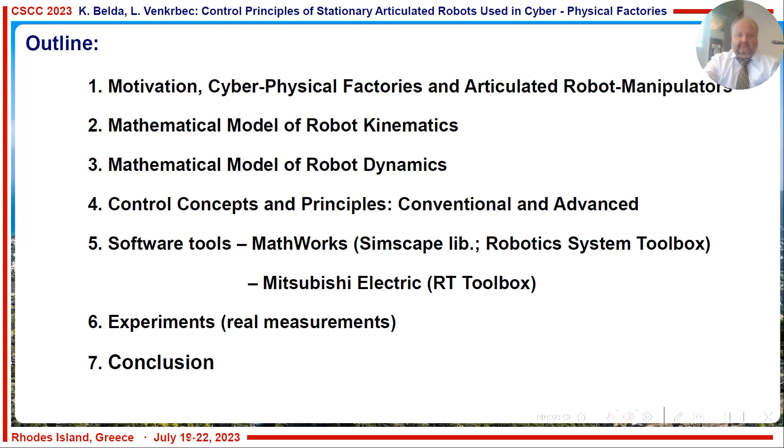Very important point is networking. So all components are set in nets, and also we should take into account big data. So we should collect the information from any sensors and make some analysis and so on. And a very important point is virtualization. So today somebody mentioned that mass production moved to customized production. That's true. So it means that all tools should have information about what you can do, and also information from the product, what the product needs to be produced or something like that.

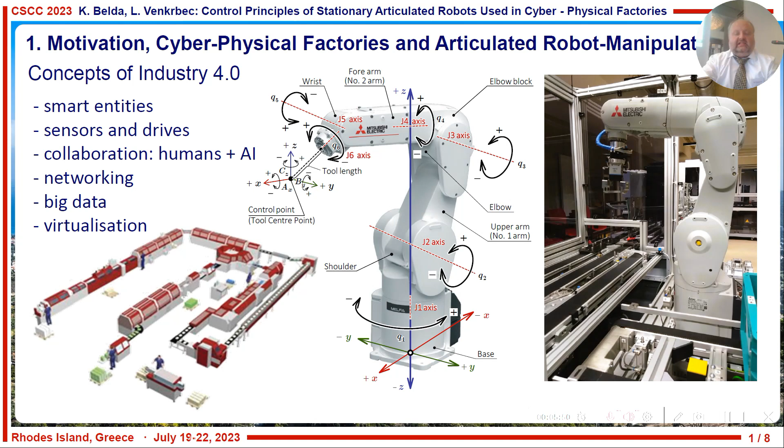So there are 6 axes, 1, 2, 3, 4, 5, 6. So this robot has 6 degrees of freedom, and tool center point at the end. You can see also 6 degrees of freedom, motion in axis X, Y, and Z, and rotation around these axes. So this is very important for modeling, because these coordinates more or less form the mathematical model.

So, as I mentioned, I would like to speak several words about mathematical model of robot kinematics. This is standard task. There are two problems: forward problem and inverse problem. So it means that at the beginning, if you have angles in individual joints, you can compute directly tool center point. It means the end effector position.

An inverse problem, it's opposite, and also it's more or less difficult, that you have only endpoint, and you should compute individual rotations in joints. So why I mentioned this, every producer of the robots has a specific selection of the coordinates.

So somebody can say, okay, this is a simple question, but firstly you should do a real deep analysis to obtain adequate information, because if you take data from some software, you don't really have joints orientation in one situation. So if you have more or less the similar situation, it is different in Kuka's company or in Mitsubishi Electric and so on. So this is important to obtain such analysis.

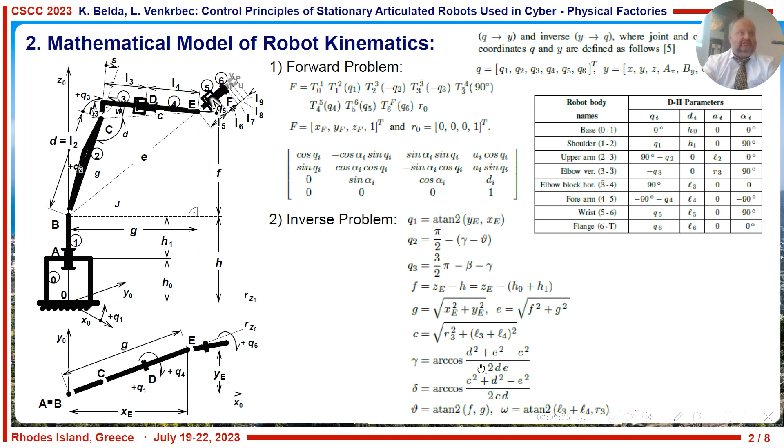So here you can see some geometric formulas based on this geometry, and you can compute individual coordinates in individual joints. And also, if you provide the time derivative of this expression, you obtain information about speed and acceleration.

The second model, which is really connected and related with the kinematic one, is the mathematical model of robot dynamics. Standard situation: from the Lagrange equation of second order, you can provide equations of motion, and you use information about kinetic energy and potential energy. We should take into account potential energy because our articulated robot is not in one plane, but in general three-dimensional space.

And by application of this formula with this prescription of kinetic energy and potential energy, you obtain these equations of motion. And as you see, there is only mathematical transformation. If you have torques at the beginning, you can compute information about joints and also the tool center point.

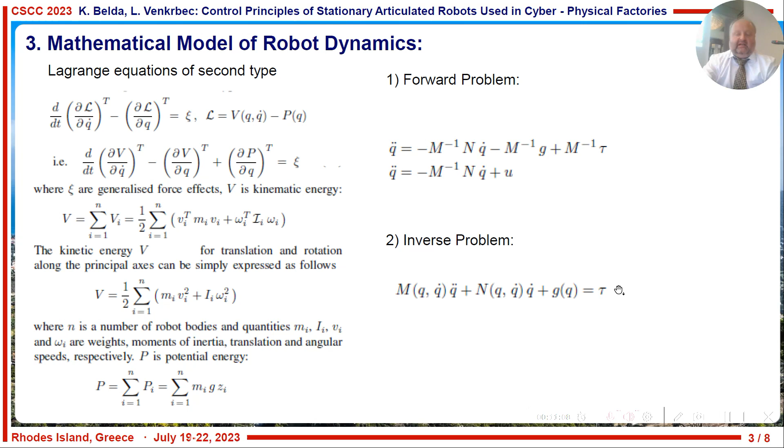This is the forward problem. And the inverse problem is the opposite task, more or less a control task. You have all coordinates and you should compute torque. It means not only one, but 6 torques for 6 joints.

Now I would like to continue with the main point of my presentation: control concept and principles. Standardly in robotics, you can see this type of conventional cascade control. It means on each drive you have such a control structure. So you have 6 standard structures like here with position loop, speed loop, current loop, and power converter

and actuator or drive. So this is standard, more or less we can say that it is okay, but this concept is more or less on the border of improvements because there are a lot of other supporting blocks, but the structure is more or less fixed. Therefore, it's important to do a different approach. Just because I mentioned the model of kinematics and dynamics, I focus on model predictive control.

This is one example of model-based control design. So there is a specific concept. It means that we can remove such structure and add something. We can optimize motion of the robot from a physical point of view, from the construction of the robot. So this is the global model predictive control, and from this we obtain reference force effects as a feed forward for local model predictive control applied on drives.

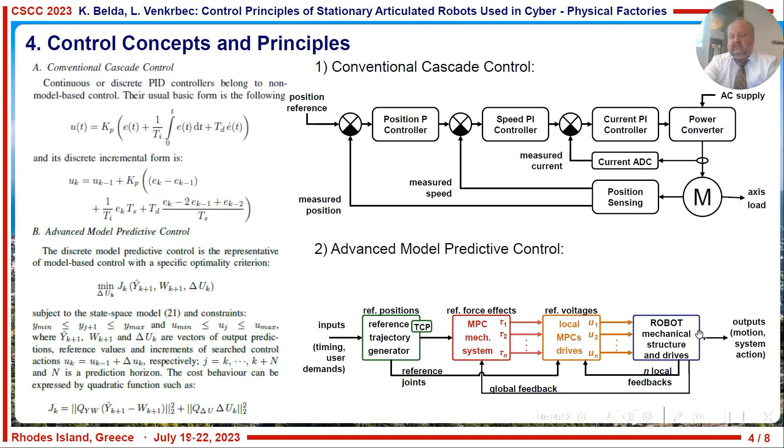So this is the main idea, that we can remove this position by model predictive control of mechanical system which generates reference force torques or force effects, and several local drives control model predictive control for the drives. So we have for our case 6 model predictive control on local level and 1 global model predictive control for mechanical system. And you can see also some feedbacks, local feedbacks and global feedback. And all is given by measurements from motor side.

Now I would like to continue with software tools. As I mentioned, today there are a lot of software tools how to provide simply modeling without mathematical background. It is very good for simulation, but for real control, you need still something, write some equations and make derivation of these equations. But for the fast prototyping and so on, it's important. So here you can see one example of Simscape Multibody library.

So it means that you download 3D model and provide some modifications, and you obtain some simple structure. Here you can see six joints, but what is around you should add. So it means that it's not so simple task, but at the beginning you push only one button and you obtain this initial structure with simple visualization.

Another more scientific approach is use Robotics System Toolbox, which can be provided directly in simple MATLAB without Simulink, and you can download individual bodies of the robot and provide also simulations. An advantage is that you can also visualize trajectory of the robot. So in this type of Simscape Multibody library, it's not possible. Here it's information about trajectory.

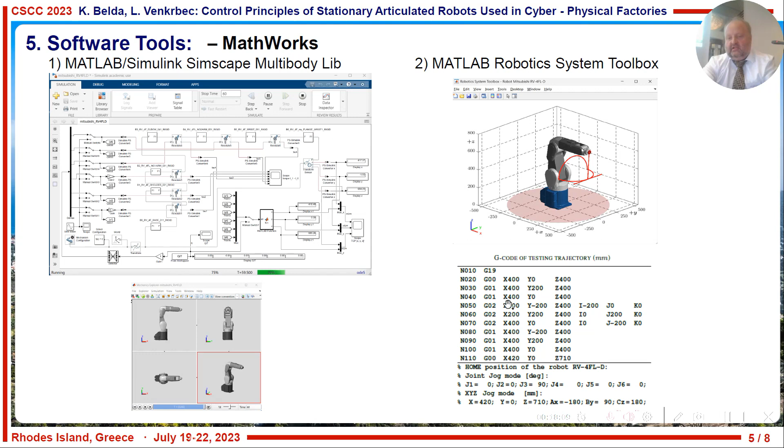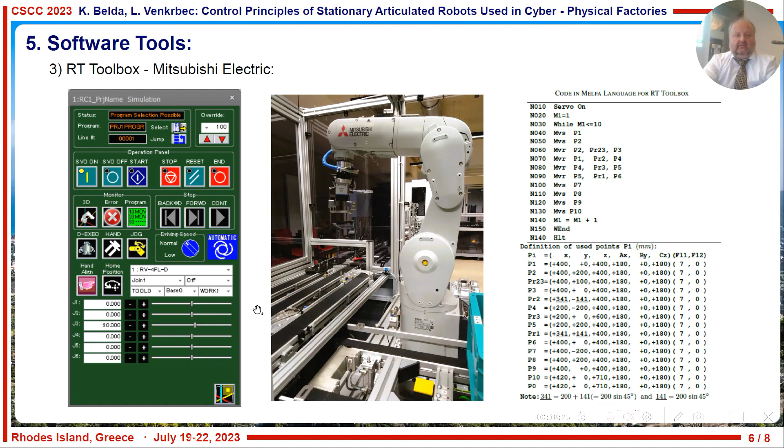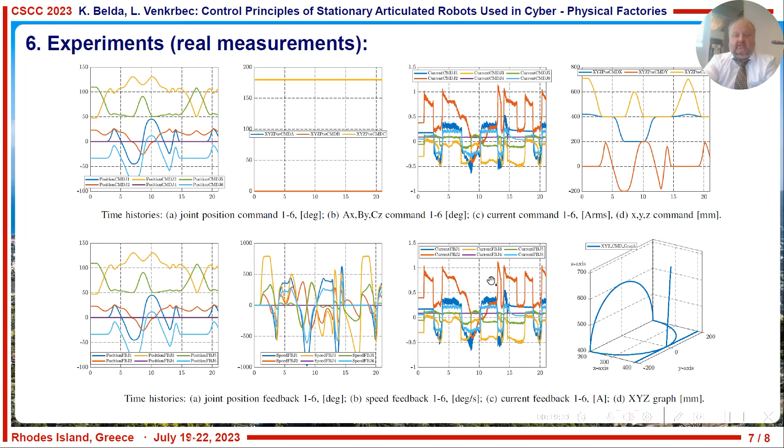but from this picture, this is the current loop, you can see exactly which joint is the most important for the motion. It's joint 2 because it moves with the robot for the whole motion, and makes the whole motion of this, and another axes are only supportive for the motion or have no relation to effects of gravitation.

So I would like to conclude my work. Modeling, mathematical models, it's better word. Mathematical models should be adapted to a specific industrial robot, as I already mentioned. I presented conventional control and advanced hierarchical control concept. And I showed representative of possible software tools for modeling, generating data, measurement and simulation, for identifying and verifying model parameters. So it means, for example, moment of inertia, weights, and so on, because the length can be measured simply by standard ruler.

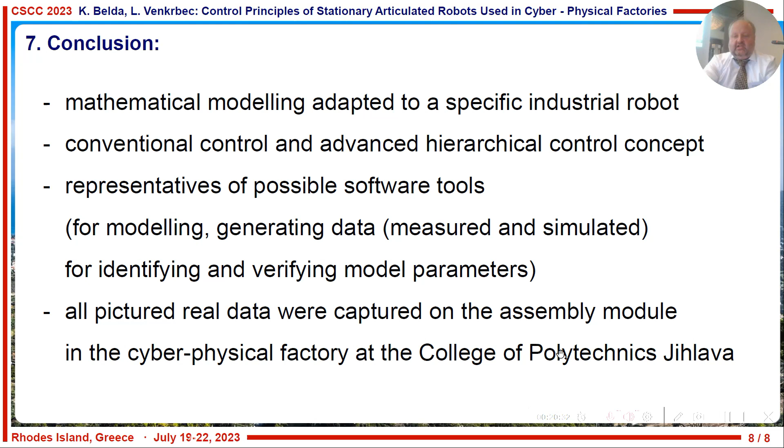And all pictures were captured on assembly module in Cyber Physical Factory at College of Polytechnics Jihlava.